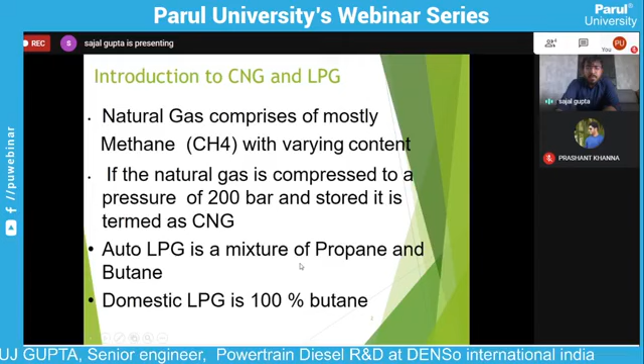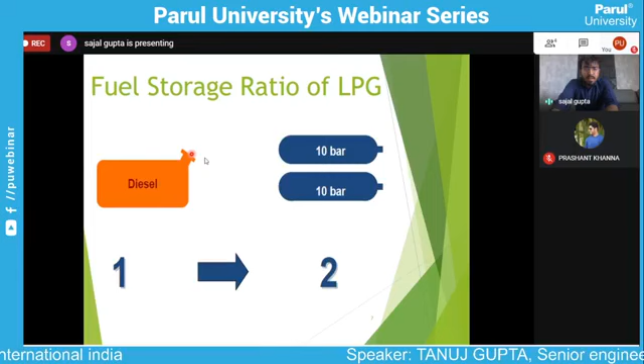Then similarly, NO2 is almost constant because the NOx does not get reduced much with CNG, and the SO2 also not, but the main factor was the respiratory particulate matter. The reason this is a huge thing is because this RSPM contains carcinogenic particles which can lead to cancer. So reducing this was a good step from the government in bringing CNG into the picture.

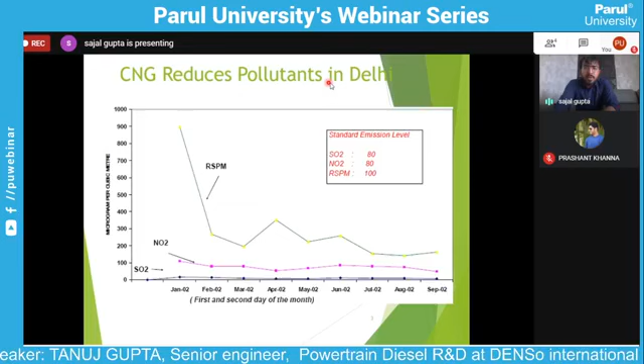Similarly, the emission norms, like now you have BS6, are also regulated by the ARAI. So each engine has to go and certify itself on the particular power and torque which they state in their brochure, and it has to be confirmed by the ARAI. Only then are they certified and able to sell in the market.

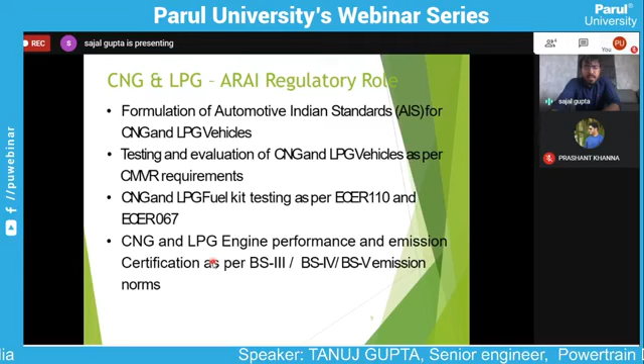So if you see the chemical formula of the CNG or LPG, everything has CH4 or carbon organic compounds. So due to the lack of air, less time or less temperature when they are burned, most of the fuel is burned, but some fuel which is left is made into hydrocarbons, and that hydrocarbon is released into the air. That will cause many problems, like greenhouse effect is also one of the issues of HC along with CO2. So these norms were then stated for the two-wheelers, three-wheelers, CNG buses, and many other things.

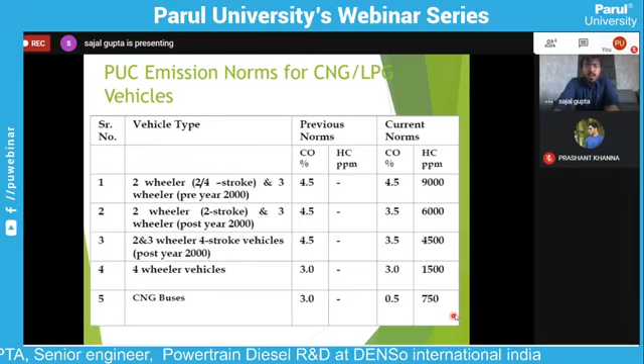So now this is for the standard. Let me show you some kit info where you will understand how it has been done. So if you all remember, in earlier stages when CNG or LPG was implemented in India, during that time many cars and many commercial vehicles were retrofitted to CNG, right? People used to go to a local mechanic and retrofit it. But now down the line, that retrofitment has been going obsolete.

The reason is that those engines where we retrofit the CNG were petrol engines. Of course CNG and petrol are almost the same from the chemical values and also the engine point of view, but not dedicated for CNG. Of course, there are some differences also. So now if you see the performance of a CNG car which is totally dedicated to CNG, the engine, the valves, the intake, and the injector of the CNG, everything is designed for CNG, and development is done on CNG.

So that CNG vehicle and the current petrol vehicle which is retrofitted have a huge difference. People earlier used to claim that they do not have good power, they are not getting good pickup as compared to petrol, but yes, it is economical, so we have moved to CNG. However, this is not the case now.

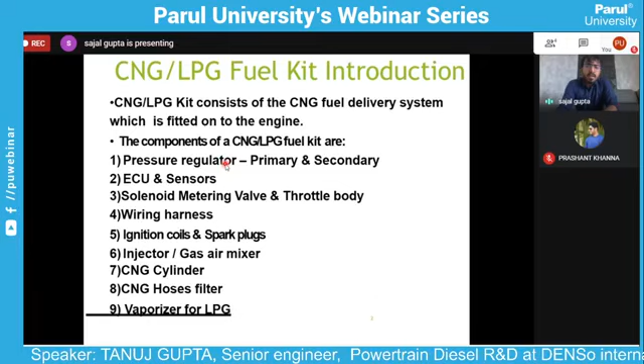This will allow the air to go through, control how much air is going, and then the injection will happen according to the opening of this throttle body. This way we improved the amount of fuel going to the engine, because this is a controlled one. Whereas in the gas valve or Venturi, it was purely mechanical.

Okay, but in BS3 it became a little bit electronic, wherein we are getting the supply understanding from the throttle body valve about the air going into that, and based on that opening, we are calculating how much amount of fuel should go. Then in BS4, we improved much better with manifold injection, wherein we introduced the injection into the manifold itself. So what happens is the fuel and air get mixed in the manifold. Okay, and then that manifold air and fuel mixture will go to the engine and then get compressed and then combustion

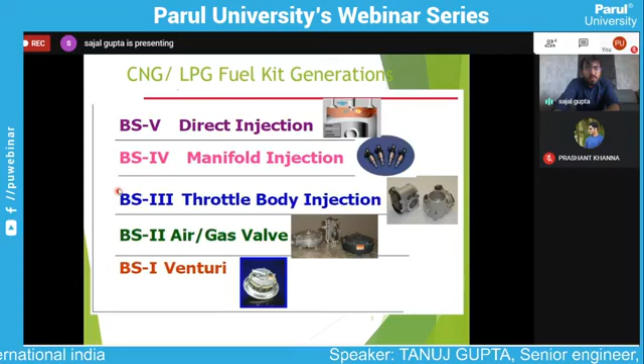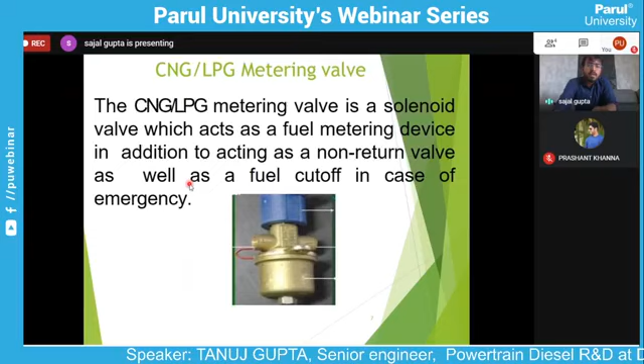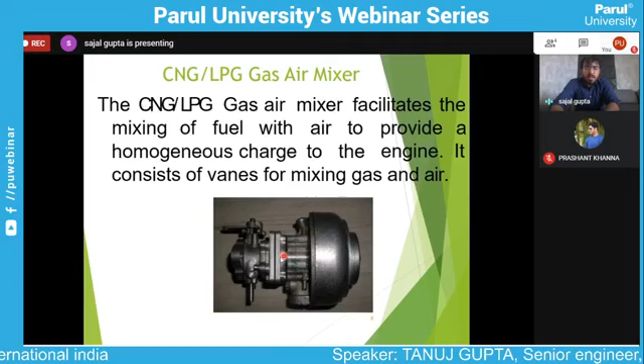Okay. So generally, as I told you, ARAI is a regulatory body which does all the testing of your engines and all. Also, since we are working at very high pressure of 200 bar and all, each of these fuel kits should have some particular standards to pass to be delivered to the market. So the different kinds of tests we do are: hydrostatic strength test. We pressurize the component to 5 times the working pressure, that is 1000 bar, to check the strength of the parts. So if a cylinder has to be filled to 200 bar, it is being pressurized deliberately to 1000 bar to see whether any damage is happening to it or not.

Okay, then corrosion resistance test we do, and the continued corrosion resistance test is for 96 hours where we do the salt spray. So deliberately we put all the parts which are to be tested for corrosion into a spray chamber where we do salt spray, to see after how much salt spray the corrosion is happening. Okay, then we do the continued operation test, right, like run for 50,000 cycles at different temperature and pressure. We call it a durability test also nowadays.